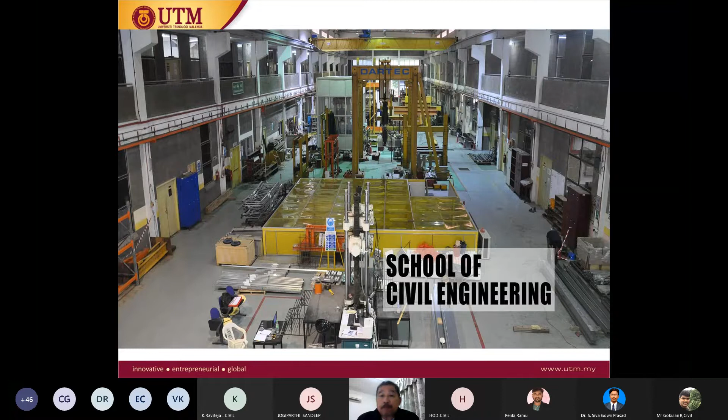All right, so this is UTM, Universiti Teknologi Malaysia. Hopefully one day you can visit us in UTM, welcome to UTM. So this is our School of Civil Engineering lab, it's a big lab actually. Normally master students, PhD students do research work here. And then this is our civil engineering, School of Civil Engineering.

All right, so thank you again to JMR IT for inviting me. I believe there are a few more presenters with different topics: application of remote sensing and agricultural waste in concrete, corrosion of steel reinforcement in concrete structures - causes and protection, green construction technologies for sustainable development, pervious concrete for sustainable construction, and also air quality during construction and water for construction. So these are very good topics to me, so that we can enhance our knowledge on that.

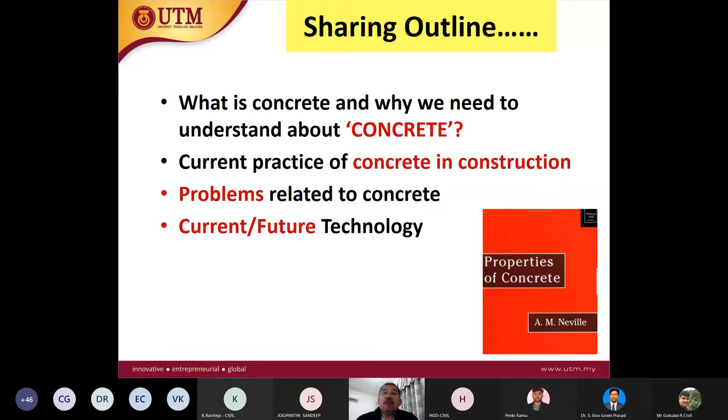So if anybody is interested in concrete, specialized in concrete, this book, Properties of Concrete by A.M. Neville, is very good. If you want to get hold of this and read through it, it's very good.

So when we talk about concrete, probably everybody understands about concrete, but not everybody understands the fundamentals of concrete. That's why a sharing session is very important, very good for us to enhance our knowledge related to concrete. So from the ingredients, we mix fresh concrete to become hardened concrete, these are the process. Why do we use concrete? Because concrete can be one of the most durable materials in construction, provided that we design properly, and we can design to whatever standard is required. So that is very important.

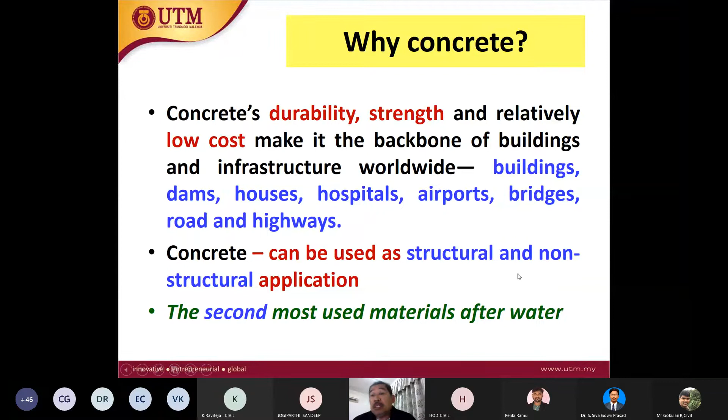Concrete can be used for structural and non-structural purposes. It is the second most used material after water in our construction industry, in our world.

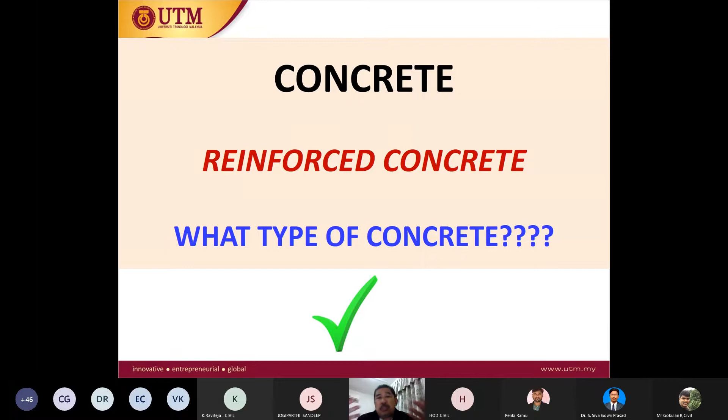We know concrete, we know reinforced concrete. So what type of concrete do we want to use for different applications? This is very important for engineers who deal with concrete to understand what type of concrete is needed for different applications, structural or non-structural. If, let's say, for structural application, what grade of concrete is required? This is very important.

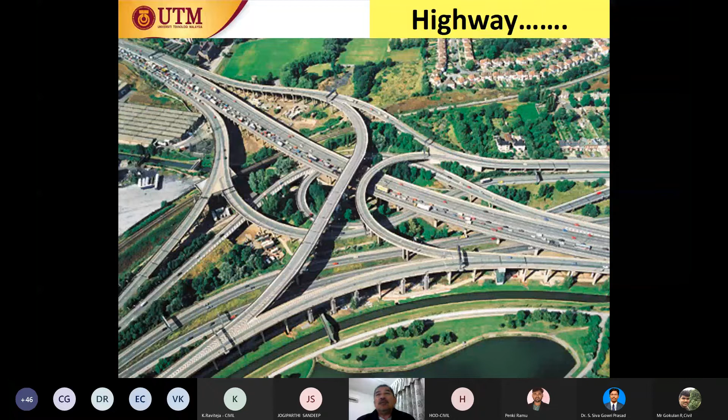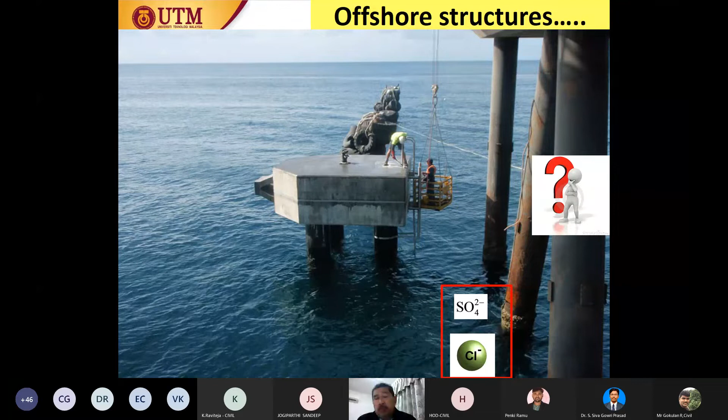For offshore structures, what are the requirements? What's inside seawater? Normally, the marine environment is very aggressive to concrete and reinforced concrete, because it contains sulfate and also chloride. These are things that we need to understand. Sometimes we need to construct our structures in very polluted areas, which can cause acid rain. So this is something that we need to bear in mind.

When we talk about concrete, these are the main ingredients: cement, aggregates, fine aggregate, water, and also admixtures. These are the main ingredients that we use to produce different types of concrete.

When we design our concrete, the most important thing is that our concrete must be workable. In terms of workability, our concrete must also be designed based on strength and durability. Strength, probably grade 40, grade 30, grade 50, and durability is the lifespan of the structure, probably 70 years, 100 years.

In order to get that strength and durability, the concrete must be dense. So how do we get dense concrete? These are the fundamentals that everybody who deals with concrete should understand.

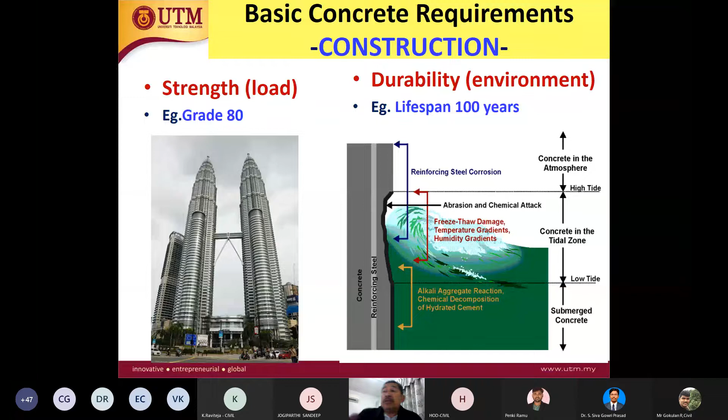Basic requirements: strength and durability. We need to consider strength related to load, and durability related to the surrounding environment. If, let's say, our structure is near the marine environment, we need to tackle the durability problem.

Related to strength, we have different grades of concrete: normal strength concrete, high strength concrete. On the durability aspect, we make sure that the concrete is very dense. How do we make sure concrete is dense? By ensuring the concrete contains more CSH gel, which is very important, and also through the curing process. This is something that is probably sometimes overlooked in terms of the curing process of the concrete.

Again, why do we use concrete? It can be designed, requires strength, has good compression. However, concrete is weak in tension. That's why we have reinforced concrete, a combination of concrete and steel.

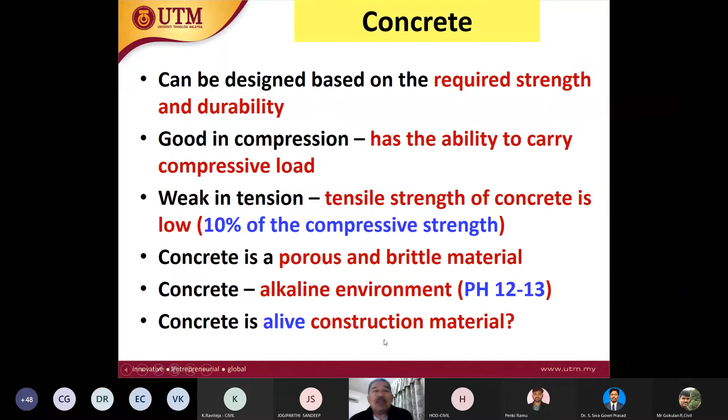Concrete is by nature a porous material, so we design to make sure the concrete is less porous. The concrete environment is alkaline, so that it can protect the steel. We can say concrete is a living construction material because it gains strength with time.

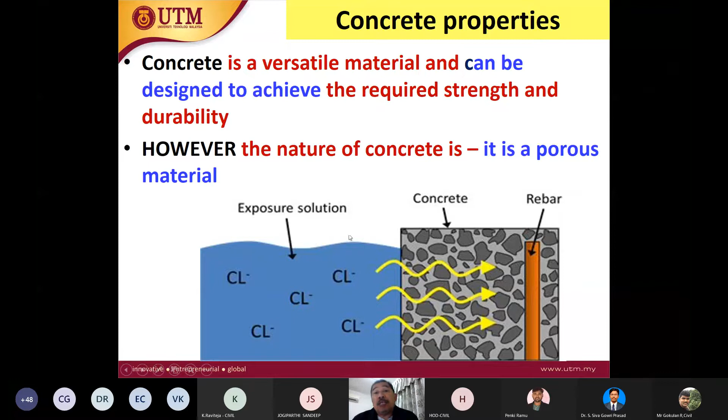The most important thing is that the concrete must be less permeable, so that whatever aggressive material is outside cannot penetrate into the concrete, because we want to protect the rebar, the reinforcement.

One of the main factors that will affect the quality of the concrete, the strength, the durability, is the water-cement ratio. The higher the water-cement ratio, the lower the compressive strength of the concrete. The lower water-cement ratio improves the compressive strength.

For high-strength concrete, we definitely need to use a low water-cement ratio. However, when you use a low water-cement ratio, the problem is workability. There's no problem nowadays because we have admixtures, chemical admixtures.

Admixtures in concrete: we have chemical admixtures and also pozzolanic materials. Pozzolanic materials are used to replace part of the cement content.

Admixtures, for example, retarder. This is used for the ready mix batching plant for transport.

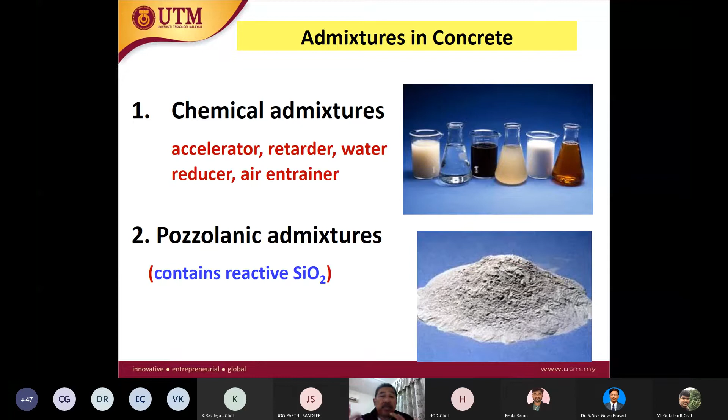Pozzolanic material, for example fly ash or silica fume, contains reactive silica that reacts with calcium hydroxide from the hydration process of cement, producing more CSH gel. Again, the formation of CSH gel is very important in our concrete to ensure that the concrete is dense.

Chemical admixtures: normally we have four types - accelerator, retarder, water reducer, and air entrainer. Normally air entraining admixtures are used for seasonal climate countries, where we have winter and summer.

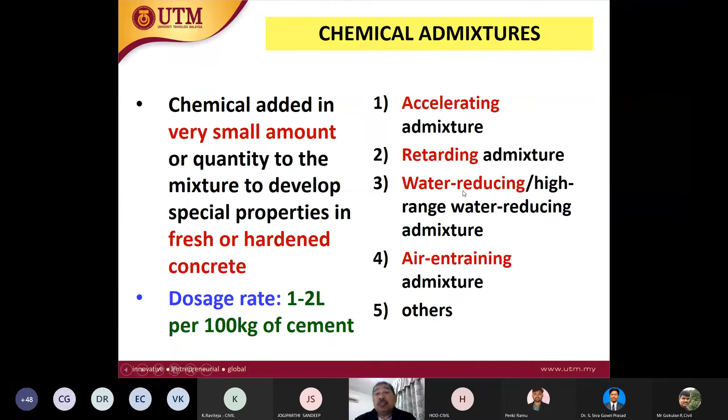In Malaysia, we don't have seasonal climate, so normally we don't use air entrainer. Normally we use retarder and also water reducer, and then pozzolanic material.

We said that is blended cement concrete, using waste material, because fly ash, slag, these are waste materials, but they contain reactive silica that can be used to replace part of the cement content, which means we reduce the use of cement in our construction.

To produce good quality, good strength, durable concrete, we must select good and the best quality material, plus we must have knowledge on that. Because if we understand about concrete, but in terms of fundamental knowledge we are not very familiar with it, then we cannot produce the right type of concrete that is required.

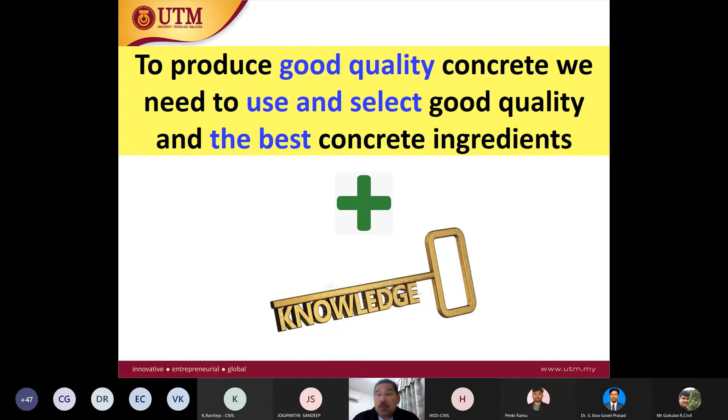As engineers, as civil engineers, the ones who deal with concrete, we can face so many problems related to concrete. So our task is to solve the problem, find the solution of the problem, and in order to find the solution, we need knowledge.

Nowadays, the term sustainable concrete, sustainability in construction, sustainable construction and so on is something we need to consider. If we talk about sustainability, what are people's demands? Housing projects, the cost in terms of economics, in terms of environment, the CO2, depleted natural resources - this is related to material.

In order to reduce the CO2, we need to reduce the use of cement. In order to reduce the use of cement, we use pozzolanic material, the waste material. So these are the things we need to understand - how to use construction material in the most efficient way.

So let's come to the technology - how we want to improve. For example, 20 years ago the strength of concrete was grade 30, but nowadays we can make grade 60 easily, because we have all the ingredients to produce that type of concrete.

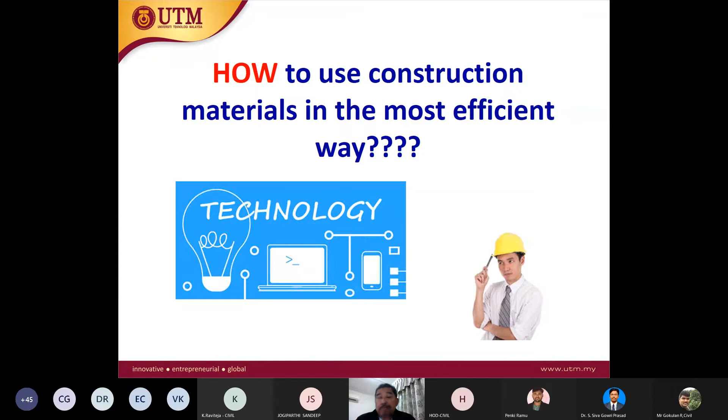In order to use material efficiently, we need to innovate something. For example, nowadays we have polymer modified cement, nanoparticles in concrete, the use of recycled material, the use of CO2 absorbing material in concrete. These are the innovations required nowadays. However, in order to innovate something, the fundamentals must be understood. So it's very, very key important.

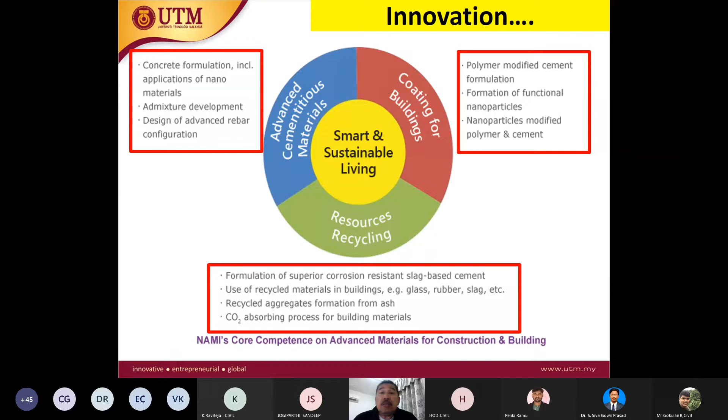We have concrete cover to protect steel. But if the concrete cover is low quality, how can this low quality concrete cover protect steel? This is one of the problems. Again, if the shell is very porous, what will happen to the inside? It cannot protect the juice inside. So these are the things we need to understand.

For concrete, the pH is about 12 to 13, so that it can protect reinforcement from corrosion by forming one passive protective layer. For corrosion to occur, it requires steel, it requires water and also oxygen. So the functions of this concrete cover, among others, is to protect oxygen from outside, water from outside, from penetrating into the concrete and reaching the steel.

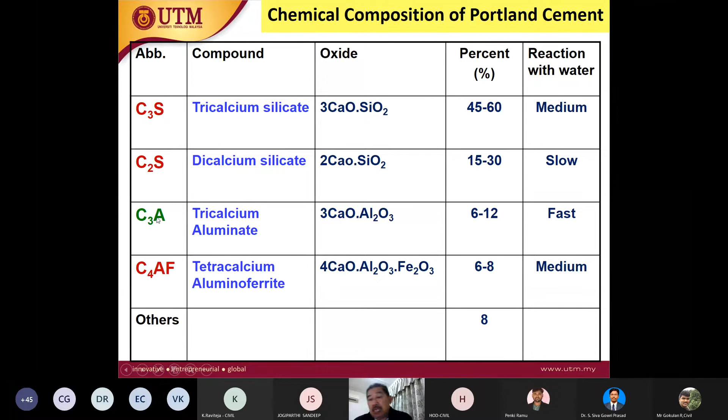If an area contains a lot of sulfate content, we must make sure that the cement we select has less C3A. For example, in a marine environment we have sulfate and chloride. Sulfate will attack C3A. This is very important to understand. The strength is governed by C3S and C2S. C3A is undesirable, but it's there inside our cement, and it tends to be attacked by sulfate.

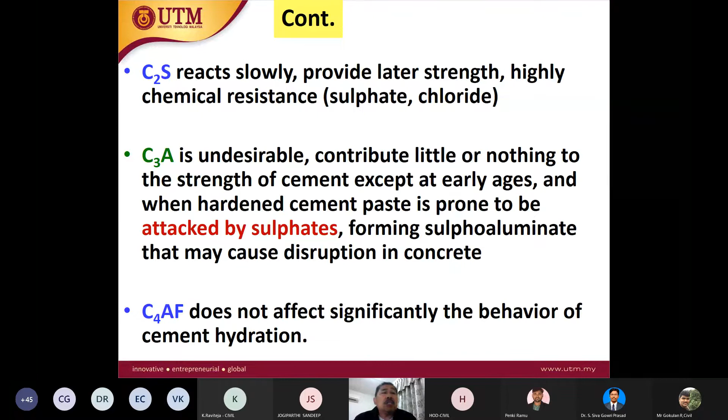So if our structure is near the marine environment, it is not advisable to use just ordinary Portland cement. Why? Because ordinary Portland cement contains a higher amount of C3A, tricalcium aluminate, so the tendency for sulfate attack is higher.

So the use of blended cement. Blended cement means a combination of ordinary Portland cement plus pozzolanic material, like fly ash or silica fume. It will produce more CSH gel. The hydration process of cement reacting with water produces CSH gel plus calcium hydroxide. This calcium hydroxide will react with reactive silica from the pozzolanic material.

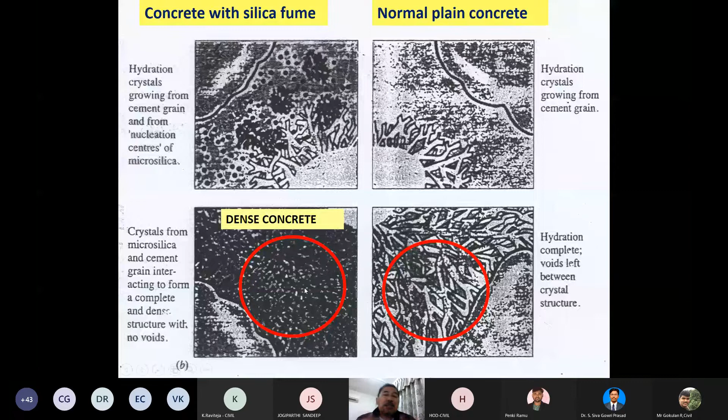This reaction with fly ash produces more CSH gel. Once we have more CSH gel, the concrete becomes very dense. So in order to increase the strength of the concrete and make it durable and less permeable, the concrete must be dense. The idea to make the concrete dense is to use blended cement, a combination of OPC plus pozzolanic material. Here is an example.

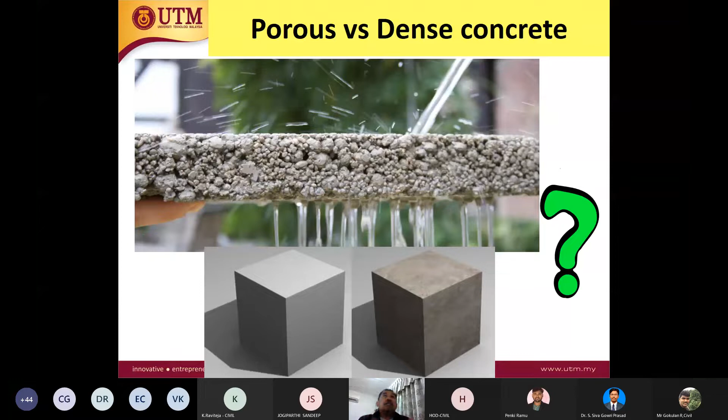We want our concrete to be dense concrete, but in different aspects sometimes we need porous concrete. That is a different type of concrete for a different application. For now, for the strength and structural application, we need our concrete to be very dense.

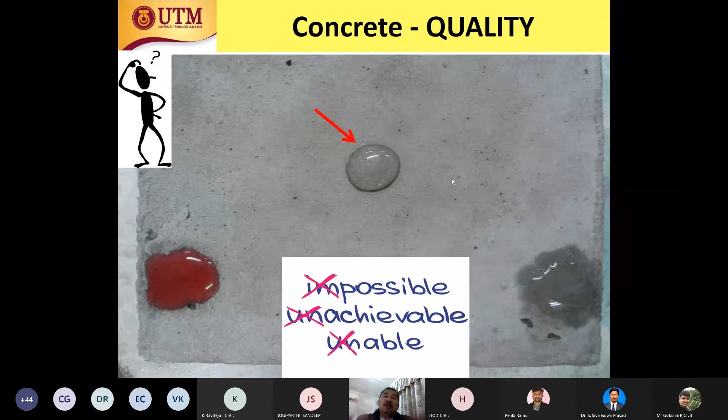Then the quality of the concrete itself - if we manufacture it properly, it can be, I would say, impermeable to water. But we need to make sure the concrete is made properly.

So the basic fundamental of concrete that everybody should understand is that when we design our concrete, we want it to be strong, which means strength and durability. In order to get these two aspects, the concrete must be dense.

In order for the concrete to be dense, the hydration process is very important - cement reacting with water, producing CSH gel and calcium hydroxide. Then this calcium hydroxide reacts with silica from the pozzolanic material, producing more CSH gel. These are the concepts.

If our concrete is dense and less permeable, it can protect our steel reinforcement.

Yeah, everything's fine, sir. Everybody okay? All right, if you have anything, just stop me.

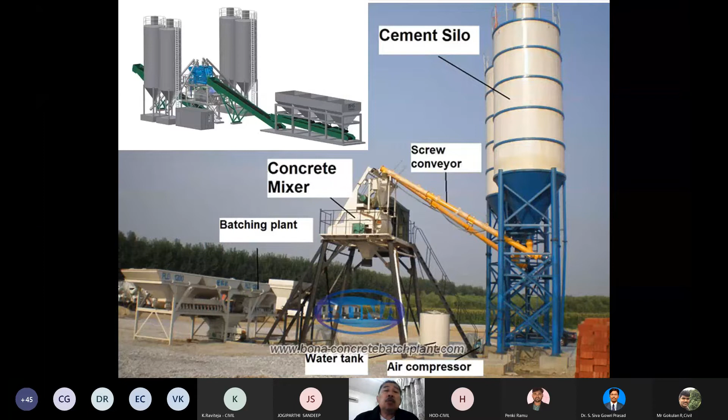Nowadays we have no problem in terms of the source of concrete. Normally it's from a batching plant, ready mix. This ready mix transports the concrete from the batching plant to the site. Normally that is the situation nowadays.

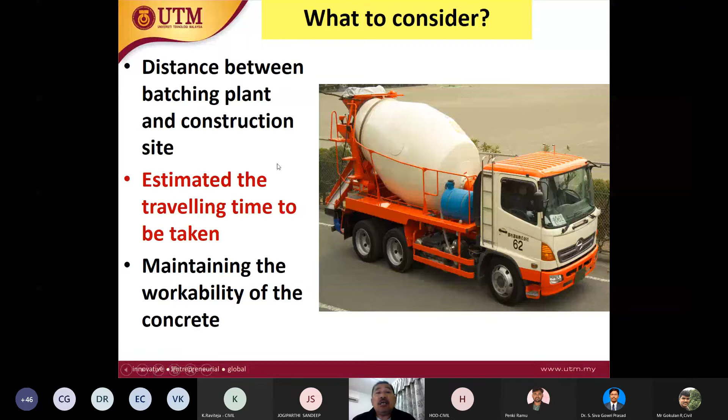If the distance is too far, we need to consider the time taken, so we need to use a retarder to delay the setting time. Then when it comes to the site, during the placing process, we place the concrete in the formwork using whatever method we choose.

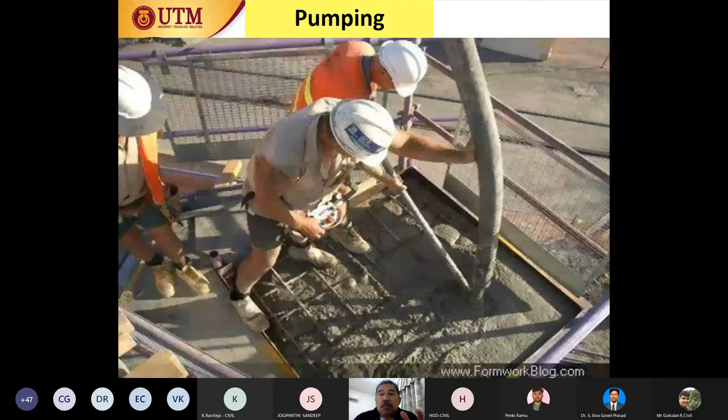Once we place the concrete, we compact it. This is the method of pouring the concrete. Once we pour the concrete into the formwork, we compact it. The purpose of compaction is to eliminate voids so that the concrete can be very dense - that's very important, leaving less void inside the concrete.

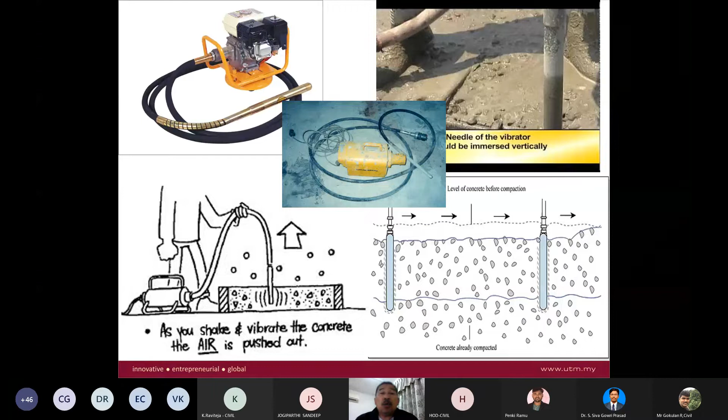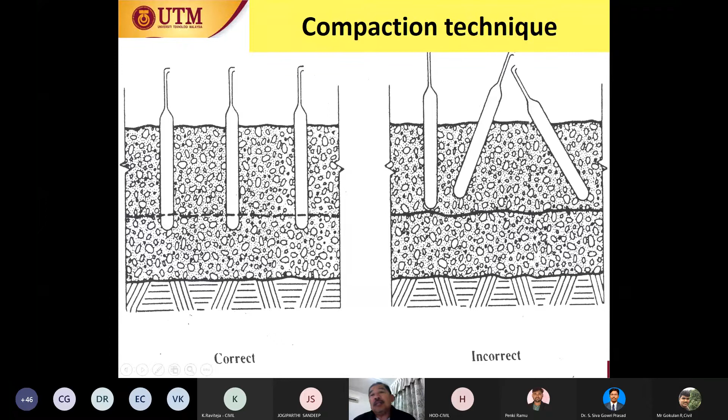Normally we use an internal vibrator, or what we call a poker vibrator. The method of compaction is also very important - we cannot simply do the compaction without a proper method. The correct method is on the left side, where the poker is very straight, and we compact from the first layer to the second layer. The right side shows the incorrect way.

After compaction, the curing process is very critical and important, because we want to protect water in the concrete sample from evaporating. This is very critical to ensure the strength and durability of the concrete can be achieved.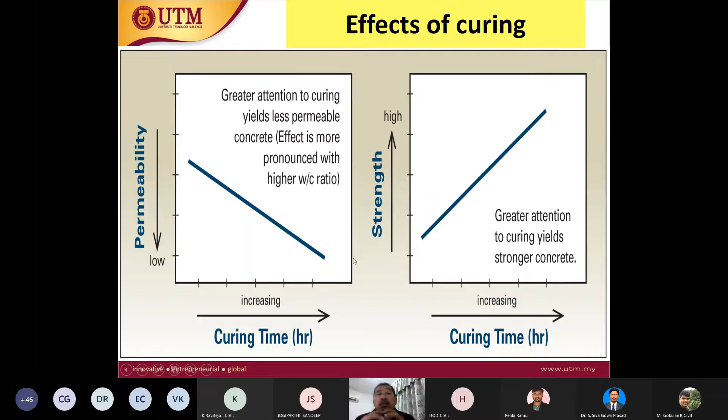Why? Because the formation of the CSH gel will become higher. So that is the very important thing.

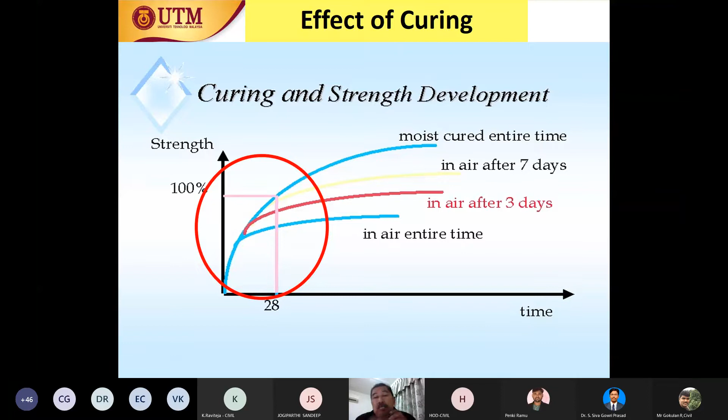So the strength versus time for different curing processes: water curing, and the bottom one is air curing. We can see there is a difference between air curing and water curing. The one we put in water has higher strength than air curing. Why? Because in air curing, some of the water from the concrete sample will evaporate, so this water, once it evaporates, we have less water for the hydration process.

That's why curing is very important. For example, if we demold the formwork after 1 or 2 days, what do we do? We cannot just leave it like that. We need to do proper curing. If we don't want to do proper curing, just leave the formwork for at least 7 days. Why 7 days? Because at 7 days, the strength of the concrete normally achieves 70% of the strength required at 28 days.

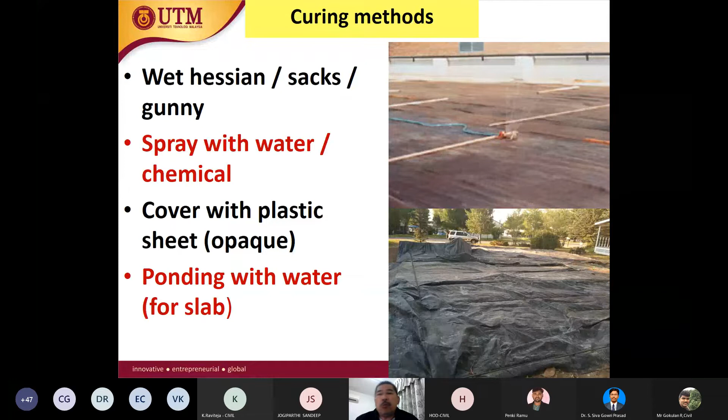So method of curing, no matter how, as long as we are able to protect the moisture from the concrete from evaporating outside, then it's okay. That is the method of curing. We have wet hessian, spray, cover, plastic, ponding with water. These are some of the methods, as long as we cure the concrete.

If we demold the formwork, then we need to cure like this, and spray water - this is ponding. We need to spray from time to time, so not only do we need workers, but we are wasting our precious water. These are the things we need to understand. So keep the formwork intact for at least 7 days normally.

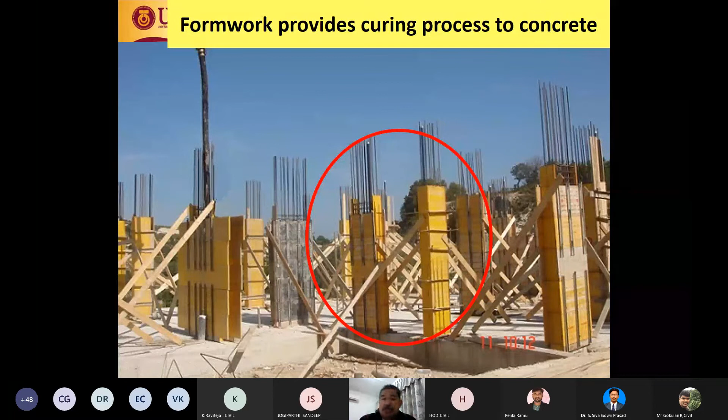If we don't put proper curing, the concrete cover becomes porous because of less CSH gel, since part of the moisture is lost. Once the concrete is porous, oxygen and water can penetrate, reaching the steel, and corrosion starts to occur. That is the concept.

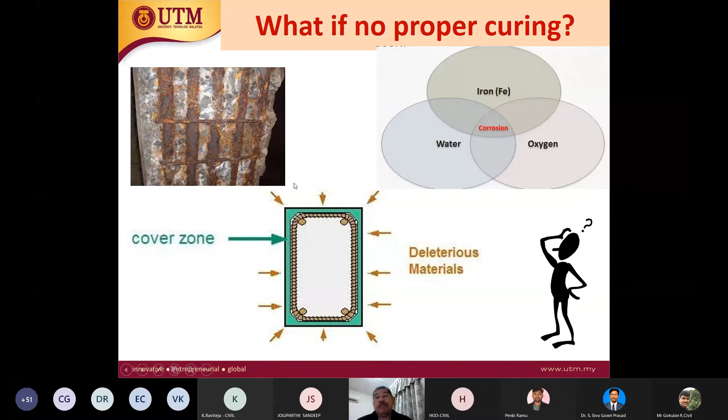So we need proper curing. The problem is related to curing, related to compaction, related to the surrounding environment. We cannot foresee - for example, for marine environment, it's very aggressive to concrete, so we need to consider that.

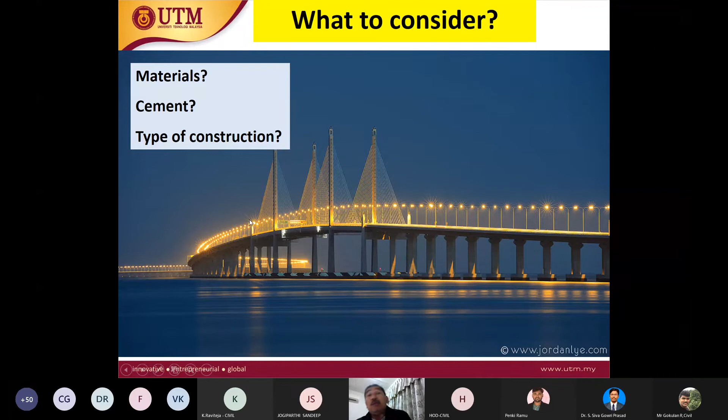For example, like this bridge - this is seawater. Seawater has sulfate and chloride, which are considered aggressive to concrete. So we need to consider what type of cement, what type of material we want to use, because concrete normally tends to crack.

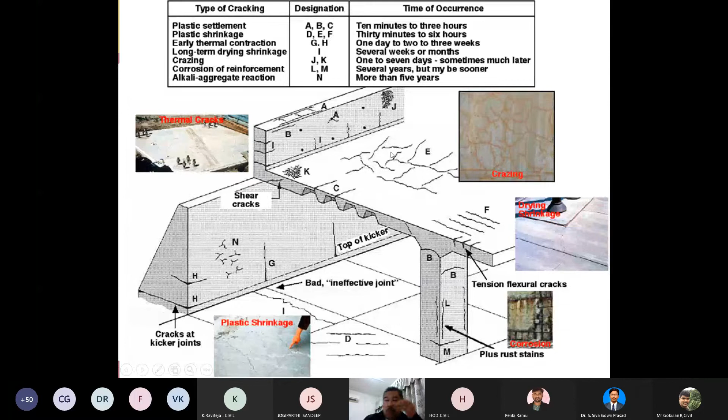Cracks in concrete can be of different types from different sources and factors. For example, if it's L along the reinforcement, L is corrosion. If it's E like this, E is plastic shrinkage. These are things we need to understand - whether that crack is a structural crack or non-structural crack.

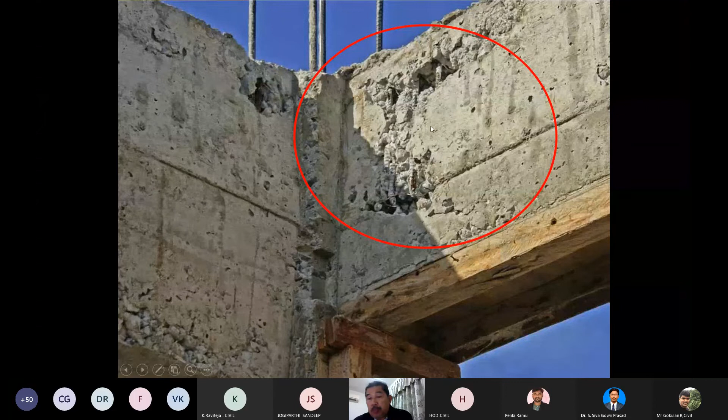And then we have this - what do you call this - it's not honeycomb, honeycomb is smaller size, but it's like a hole like this. If this happens when you demold the formwork, we need to do proper repair, proper repair methods. If not, then we have a corrosion problem.

Why? Because once the reinforcement starts to corrode, it will induce internal stress in our concrete. Once internal stress is very high, the concrete will crack. Once concrete cracks, it starts to spoil. These are some of the problems.

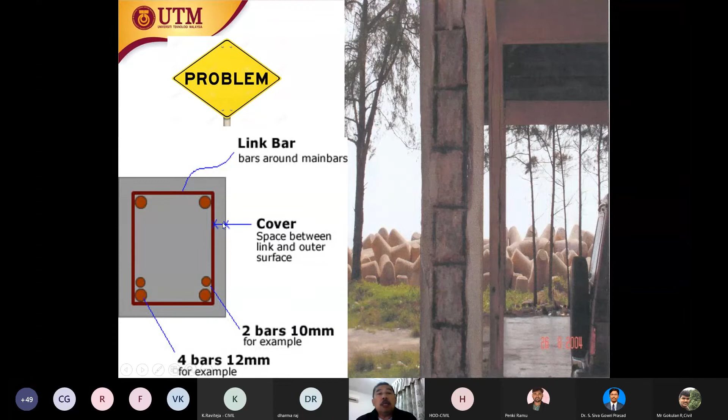On the right side this is due to corrosion, this one probably due to the load, overloading. That's why it's important for us to understand, to make sure the concrete cover becomes good quality. Curing process is very important to make sure the concrete cover, which is probably 25, 30, or 40 mm, becomes good quality, less permeable concrete cover, to eliminate this sort of problem, since the surrounding environment is very aggressive.

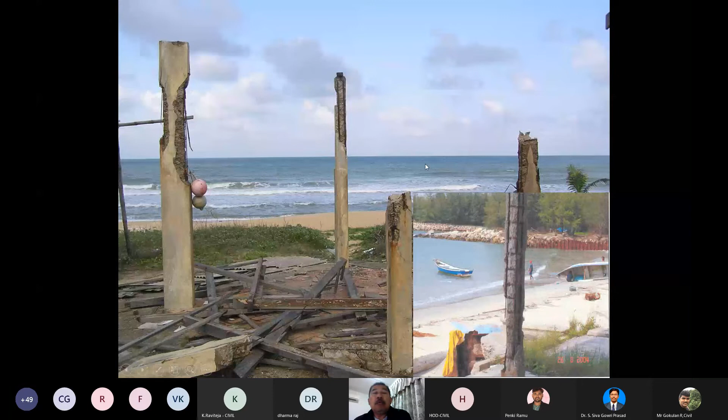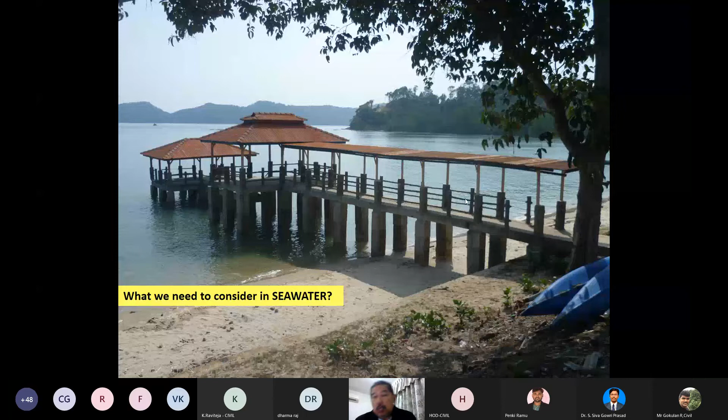So same thing here - why does this happen? If we look at the concrete mix here, I think there's less amount of cement. When we have less cement, it becomes very porous - less CSH gel - that's why the steel corrodes. Same thing, one example, if we have this like the jetty, which is exposed to seawater here, the problem normally becomes corrosion.

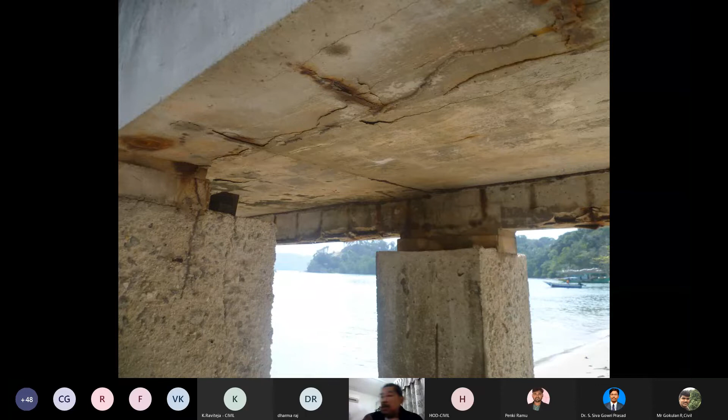It will be the corrosion. Why? There are many factors - probably the use of cement, the different types of cement that we use. Probably they use only OPC, ordinary Portland cement. So the one I said earlier, the C3A content in Portland cement is higher. So this is very important for us to understand.

If we make construction in an aggressive environment, we need to understand what type of concrete is suitable for that. Corrosion - this is very dangerous.

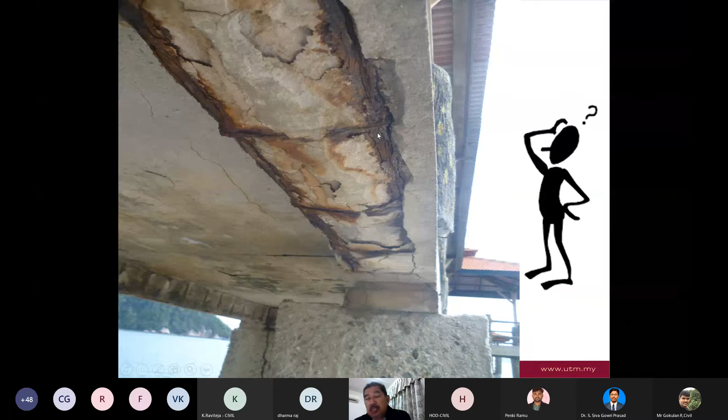Again here, exposed to seawater. What happened to the column? We have a problem of column cracking like this, probably due to sulfate attack, and then concrete starts to crack, then we have further problems. So if exposed to seawater, we need to consider the solution, how to solve the problem.

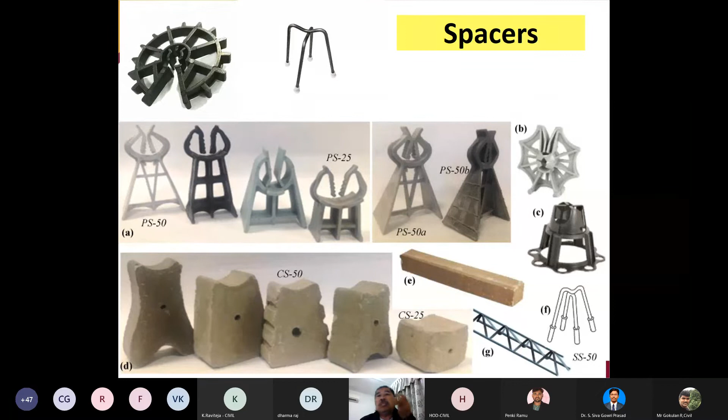Another aspect I want to highlight is the spacer that we use in our construction. How good is the spacer? If we design our concrete grade 40, is the spacer grade 40? If the spacer is just using normal mortar, low quality mortar, then it becomes the door and window for aggressive material to enter, reaching into the steel. So this is very important.

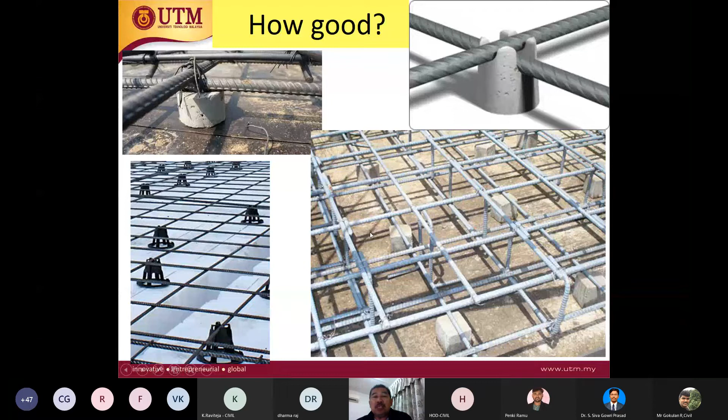Sometimes, in order to solve problems related to concrete, especially corrosion, we have special concrete. If the construction problem requires us to pour concrete at a faster rate, we make sure the concrete can be pumped - so we have pumping concrete. How to produce and design pumping concrete? Obviously we need to use chemical admixture.

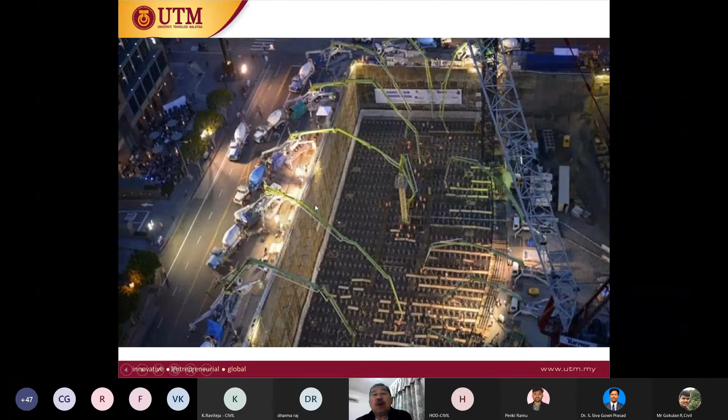Sometimes we need to do construction in very large areas, and sometimes we pour concrete 24 hours non-stop. These are the aspects nowadays considered as special concrete - flowable concrete, pumping concrete, self-compacting concrete. But the fundamental concept of concrete is the same: it needs to be designed properly, it must be workable, and different types of cement are used for different applications. These are things we need to bear in mind.

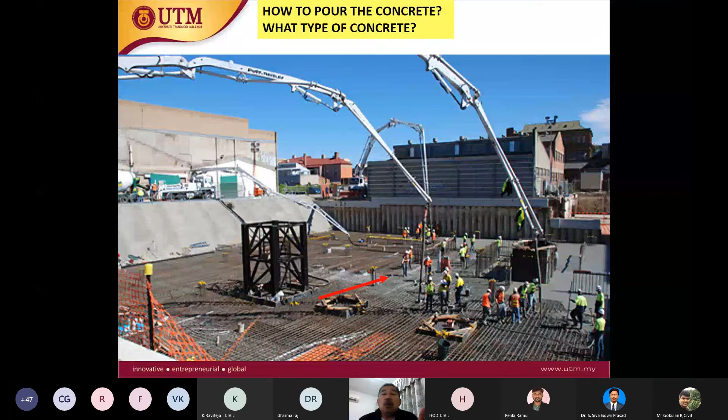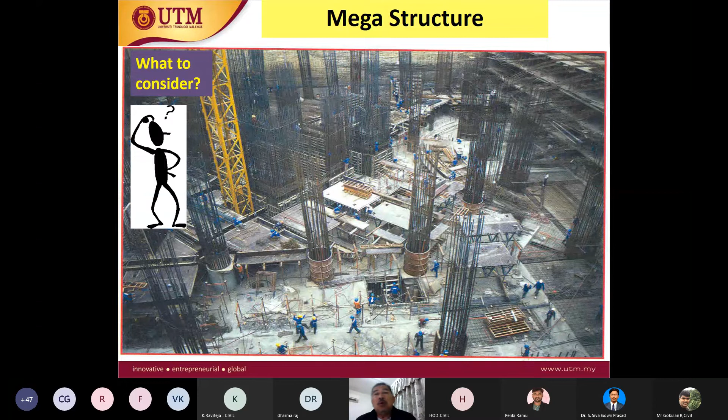This is pumping concrete. What happens with a very large area like this? The problem of plastic shrinkage may occur. To solve that problem, we can use fiber reinforced concrete. For mega structures like this, very big, very large columns, the strength of concrete must be high strength concrete, and flowable concrete types make it easier to do the concreting process continuously.

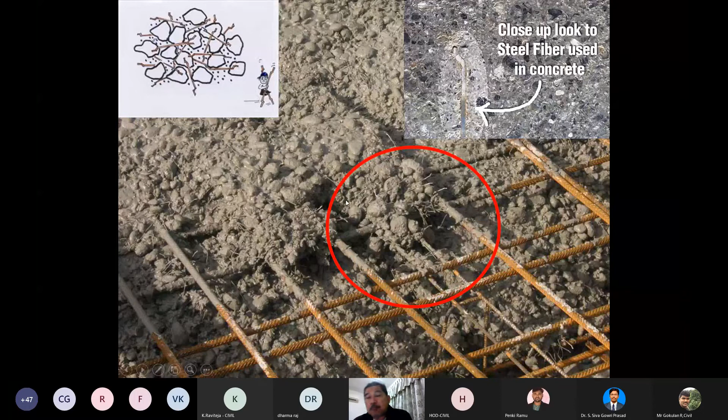Another aspect is that concrete's tensile strength is very low, roughly 10% of the compressive strength. To improve the tensile strength, we can add short fiber, becoming fiber reinforced concrete - this is special concrete. These are the short fibers. For structural application, we normally use steel fiber - we have polymeric fiber, steel fiber, and natural fiber, but for structural application we normally use steel fiber.

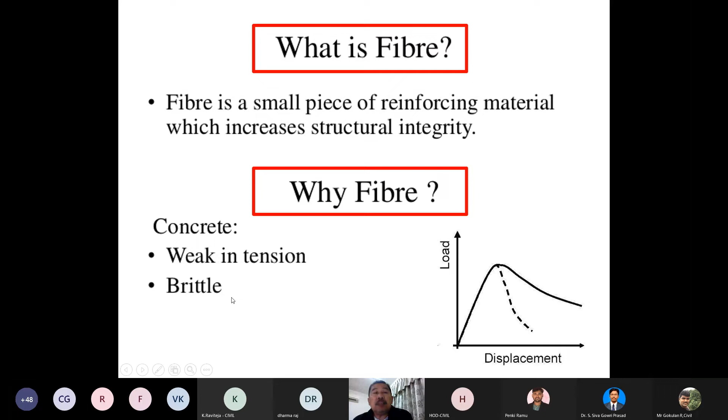So we can solve the problem of weak tensile strength and the brittleness of concrete using short fiber. These are different shapes of steel fiber. The idea is that fiber reinforced concrete can increase the tensile properties of the concrete, meaning the strain of the concrete can be increased before it fails.

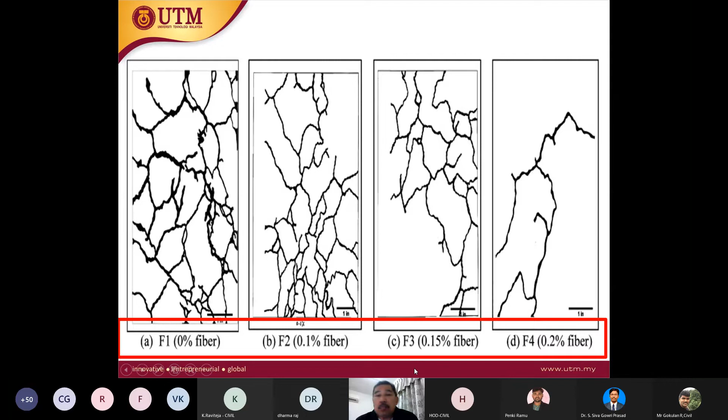Because it's special concrete, it's used for special applications - for example, in areas where we expect impact load. To reduce cracks, we use fiber reinforced concrete. This is 0% fiber, this is 0.2% fiber - the amount of cracking is less because of the fiber.

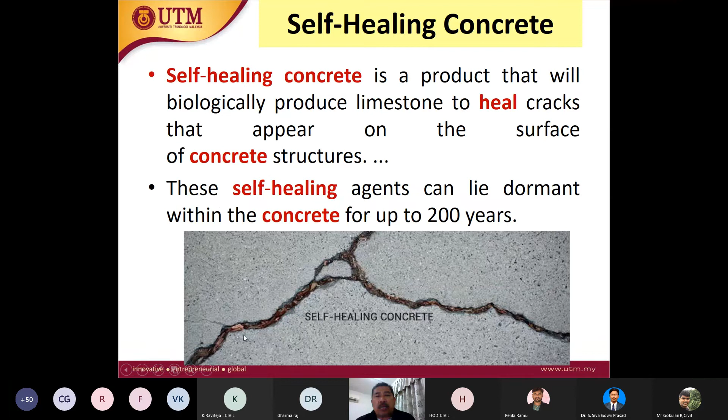We also have what we call self-healing concrete. Normally concrete will crack - for micro cracks, the concept of self-healing concrete can eliminate or reduce maintenance cost. Nowadays this is one of the topics - bio concrete, bacteria concrete, good bacteria. These are Bacillus megaterium, Bacillus sphaericus - some examples.

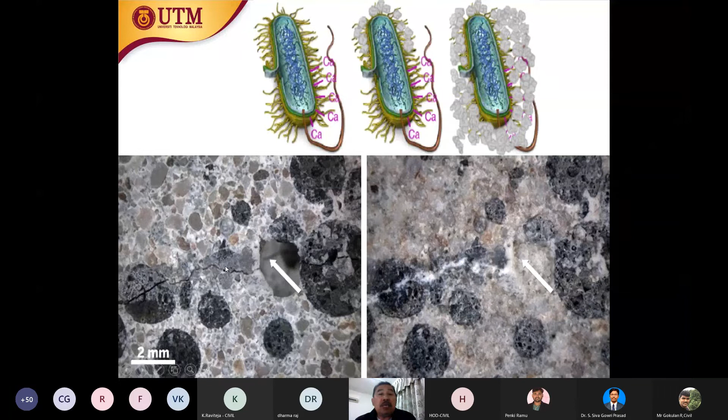This is a crack. Once the concrete cracks, we have bacteria inside here. The bacteria will activate and create or form calcium carbonate, the white color substance, which fills the cracks. This is the idea nowadays - self-healing.

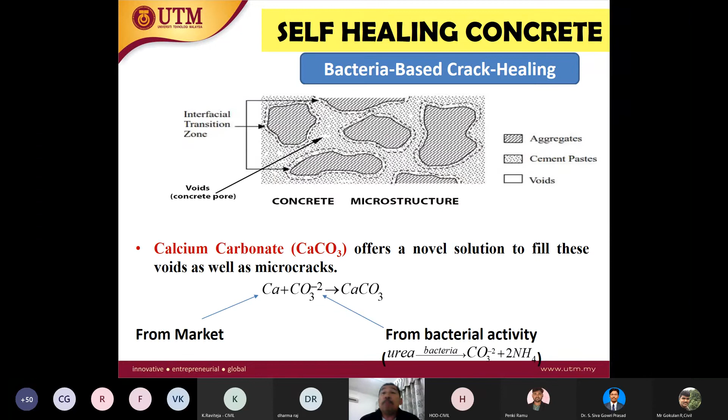Within 14 days, within 3 weeks, you can heal the cracks. So not only do we use bacteria, but sometimes we use polymer-based material. This is one of the current, future technologies that may be used in our construction - the self-healing concept.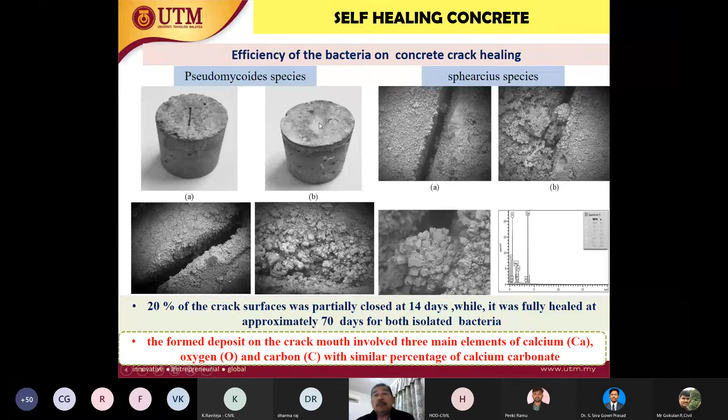This is one of my students doing this test. We took a sample of soil in UTM, Malaysia, and then we cultured it and put it inside the concrete. So this is without the bacteria, and this one is with bacteria. The crack here is being filled with calcium carbonate. So this is the concept.

Then we use microcellular - this one using polymer-based agent, polymer-based material. So self-healing concept. It's very important to heal the micro cracks, in the area where we cannot see the cracks. So it is very important to seal the cracks in that area.

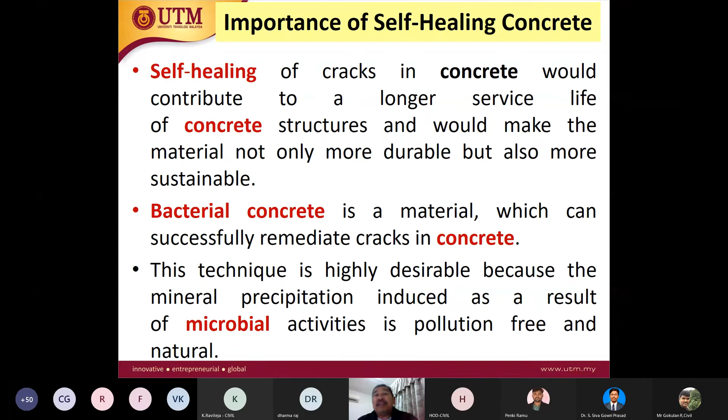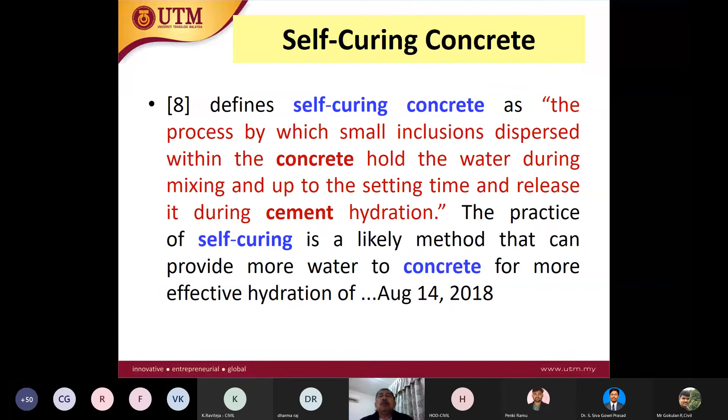Another one is in terms of curing. Curing process is very important, as I said earlier. What is the purpose of curing? It is to keep the water inside the sample. Sometimes the curing process is not done properly, so we introduce the concept of self-curing concrete - the concrete can introduce certain material that will absorb more water, that will provide internal water reservoir.

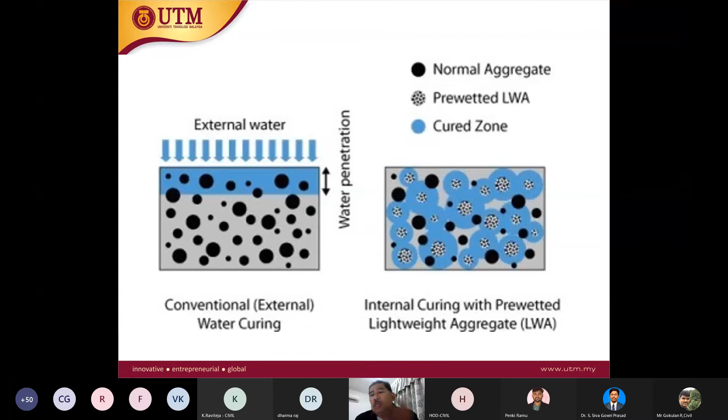Sometimes we use lightweight concrete. If we use lightweight aggregate, yes, it can absorb water, it can introduce the internal curing process. However, it will affect the compressive strength, so we don't want that. If there's no proper curing, the quality of the concrete will be very low.

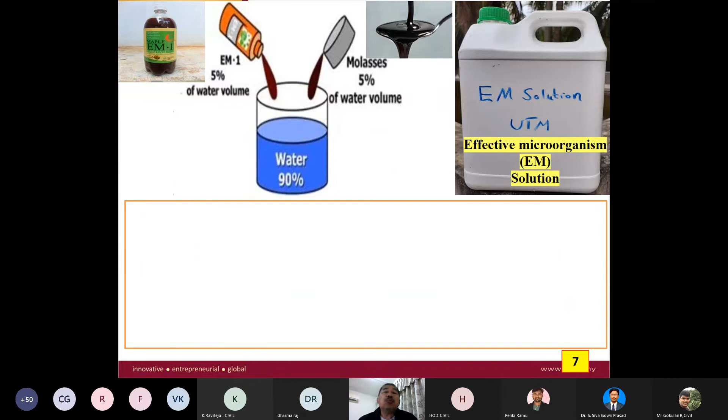One of my students used what we call effective microorganism as a self-curing agent, to see whether it can be used as a self-curing agent or not. He also graduated. From the findings, we can see that effective microorganism, normally used for agricultural purposes, can be used in concrete to enhance certain properties of the concrete.

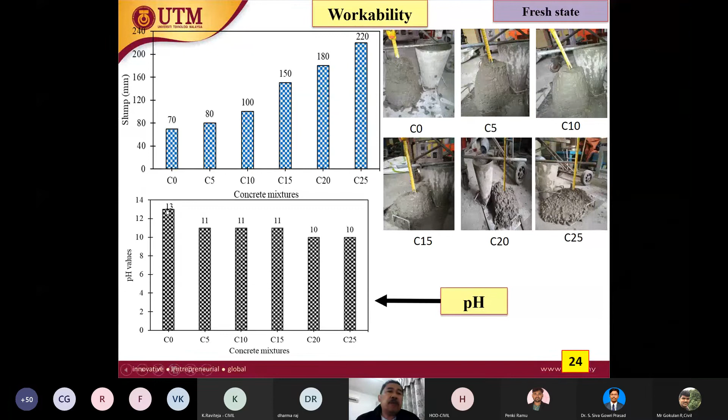For example, in terms of workability, in terms of the pH value - if we use effective microorganism, the pH will be lower. This is probably good for bio concrete, bacteria concrete, because if the alkaline environment is very high, it may not work well for the bacteria. It also reduces shrinkage and expansion, because the microstructure of the concrete becomes different by using EM.

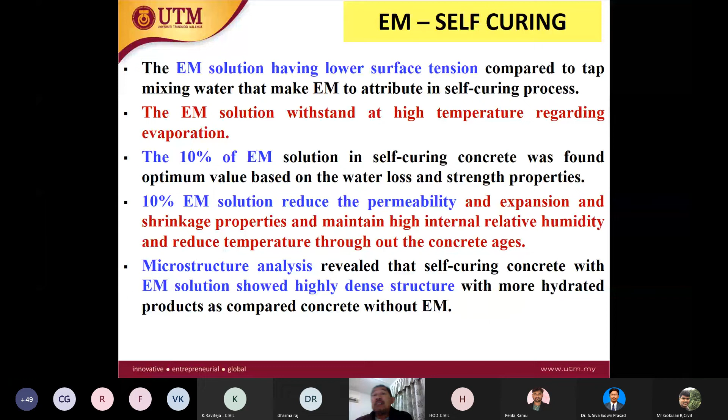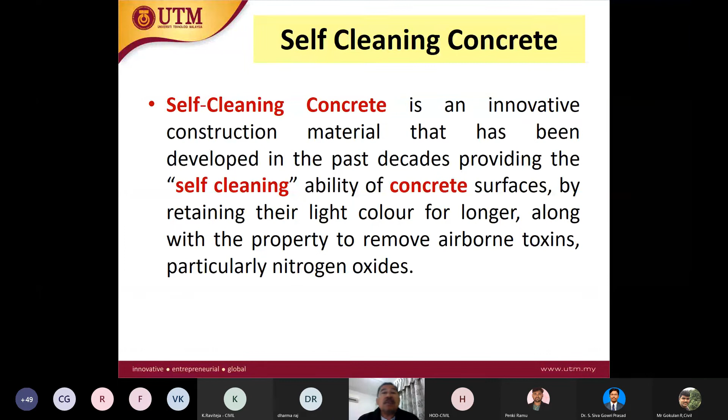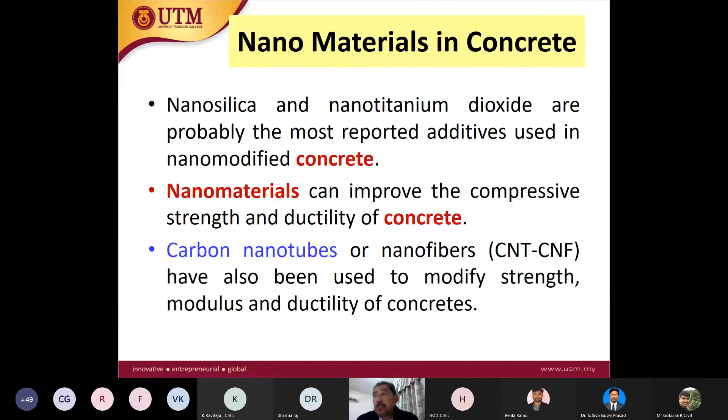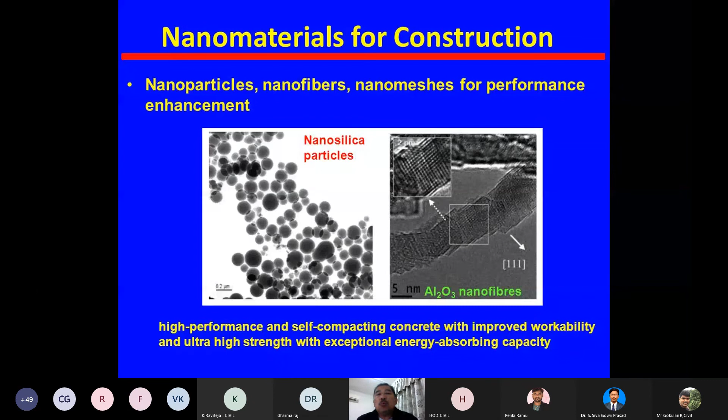The last one is nano material in concrete. Nowadays we try to use smaller size of material, becoming nano material. But nano material is very fine, very dangerous, so we need proper protection when using nano material. However, the use of nano material improves the quality and properties of the concrete related to strength and durability. This is what researchers nowadays try to look into - improving the quality and properties of the concrete.

So some of the applications: self-cleaning, self-healing, ultra high performance - the use of nanomaterials in concrete.

I think it's been nearly 1 hour. Whatever it is, the sharing, however you get the knowledge is not the focus, but the most important thing is knowledge is very important. Knowledge is power - through knowledge, we can invent something new.